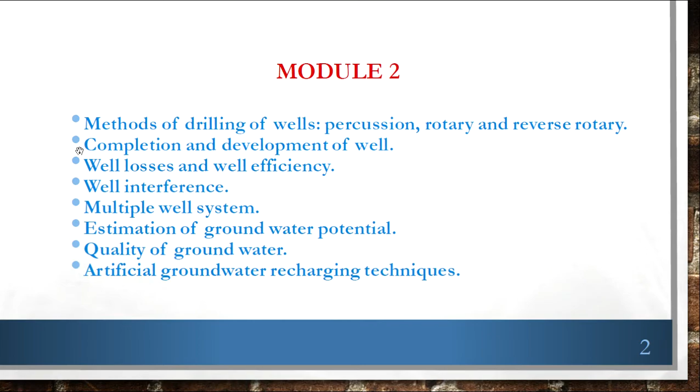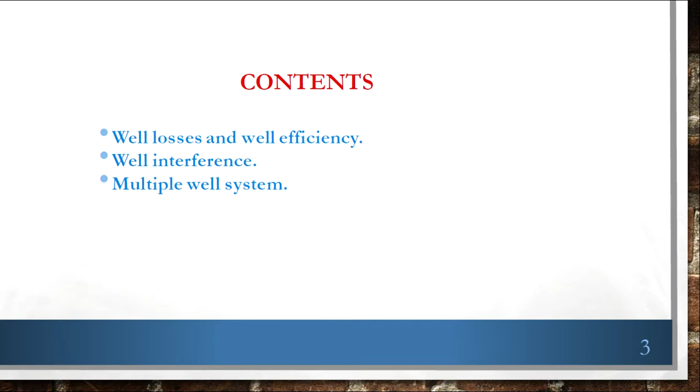In this lecture, we are moving on to module 2. In module 2, we are moving on to the contents: well losses and well efficiency, well interference, and multiple well system. These are the topics which we are going to discuss today. Before moving on to the specified topic, we have to know some important terms related to well performance.

First one is the static water level. This is the water level in the well, or water level in the well without pumping. If pumping is not there, then the water level in the well is known as static water level. It is the normal water level.

Now, what is pumping water level? Pumping water level is the water level in the well when pumping is continuing. So it will be lesser than that of the static water level.

Now, what is drawdown? It is the difference in level between the static water level and the pumping water level. When pumping occurs, the water level in the well decreases slightly. That decrease in the water level is known as drawdown.

Now, well yield or well flow rate. It is a volume of water per unit time discharged from the well. Example, in meter cube per day - how much is the amount of water discharged per day.

Another term is specific capacity. Specific capacity is the yield per unit drawdown, meaning capacity of the well per drawdown. Specific capacity is Q by S, where S is the drawdown.

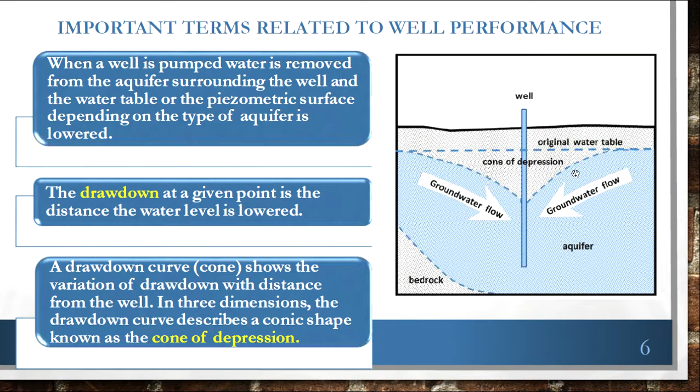Now we will move on to another term, that is cone of depression. This means while pumping occurs in a well, the water level in the well and the surrounding areas form the shape of a cone, that is known as cone of depression. In this figure, you can see the static water level and the pumping water level, and the area in between forms the shape of an inverted cone - this cone is known as the cone of depression.

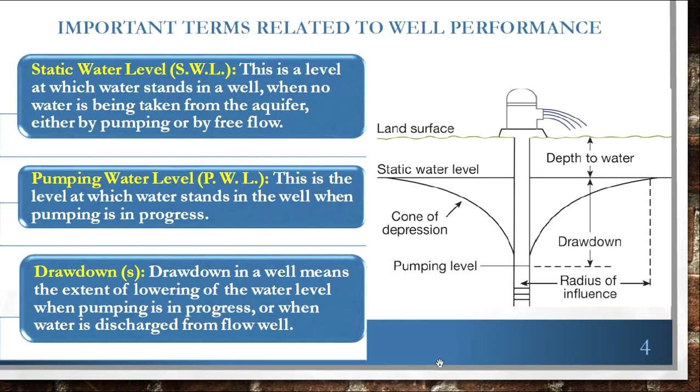Now, area of influence. We can say that it is the outer limit of the cone of depression. So how much area surrounding the well is influenced by this discharge or pumping - it is known as area of influence.

And radius of influence is the radial distance which is influenced by the pumping, or we can say it is the radial distance between the pumping water level and the original static water level during pumping. So these are the different terms which we have to know before moving on to the lecture. Now we'll move on to our first topic, well losses.

So what do you mean by well losses? We have discussed about drawdown - the decrease in the water level during pumping. But the calculated drawdown, we can calculate theoretically by use of some graphs and such. The theoretical drawdown and the actual drawdown will be different - it will not be the same.

That difference comes due to the losses in the well. In the well there may be some losses of water, some types of head losses. Due to that losses, the theoretical and observed drawdown will be different. That loss is known as well losses.

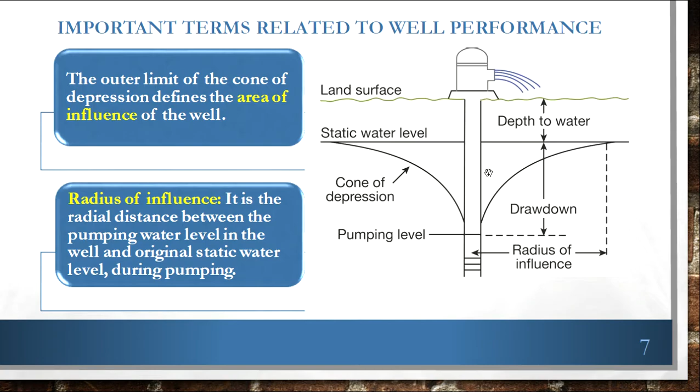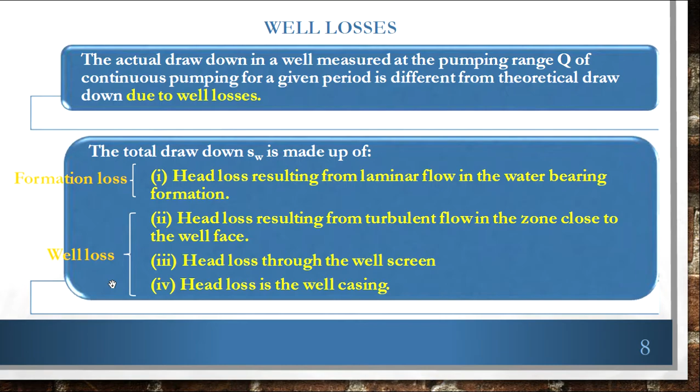Another reason for well loss is head loss in well casing. Well casing means this - when water flows through this, there is another head loss. So these are the different causes by which well losses occur. It can be generally classified as formation loss and normal well loss - these are the four reasons by which well losses occur.

This is an illustration of well loss. Normally, if there are no losses, the drawdown will be S1. Due to these losses, S2 will be the drawdown - that much water will be taken out of the well.

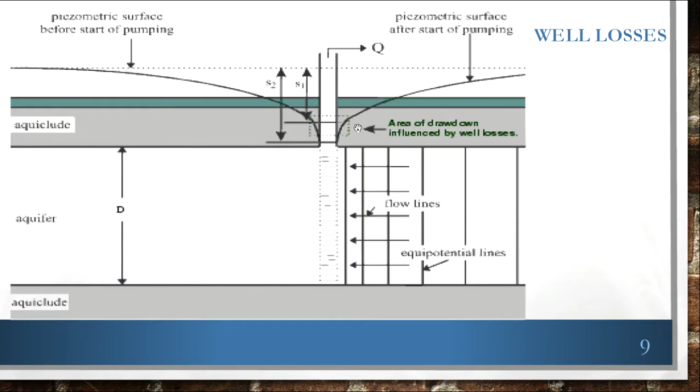Now how can we express the well losses? The equation for drawdown is given as the sum of formation loss and well loss. We have already discussed two types of losses in the well - formation loss and well loss. Well loss occurs due to three different reasons, while formation loss occurs due to one reason. So the total drawdown is a sum of well loss and formation loss.

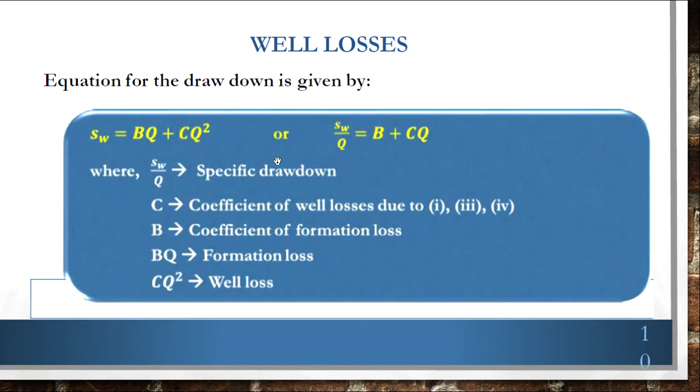Well loss is CQ square and formation loss is BQ, where B is the coefficient of formation loss and C is the coefficient of well losses due to reasons 1, 3 and 4 discussed earlier. This can be written as SW by Q equals B plus CQ, where SW is the drawdown, and SW by Q is the specific drawdown. This is the equation for well losses.

Now how can we calculate this? When we plot a graph between SW by Q and Q - that is specific drawdown and discharge - the graph will look like this. The slope of this graph will give you the C value, the coefficient of well loss.

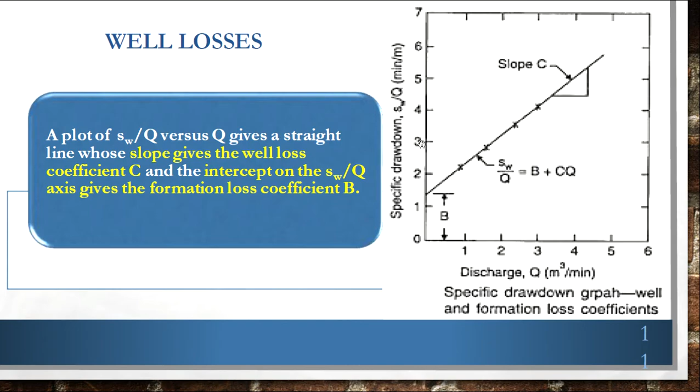And the intercept on the specific drawdown axis will give you the value B, the formation loss coefficient. So when drawing a graph between specific drawdown and discharge, the slope gives the value of C, and the intercept gives the value of B. This way we can calculate the well loss and formation loss.

Now how can we demonstrate these well losses? We can demonstrate this in three different ways. Well loss is there, but how can we say there is a well loss? What is the proof for that? There are three different ways by which we can demonstrate the well loss.

One is from the recovery immediately after pumping is stopped. The second way is from the distance drawdown curve if an observation well is available - this method can only be used if there is an observation well nearby. The third way is from the step drawdown test. These are the three ways by which we can demonstrate well loss.

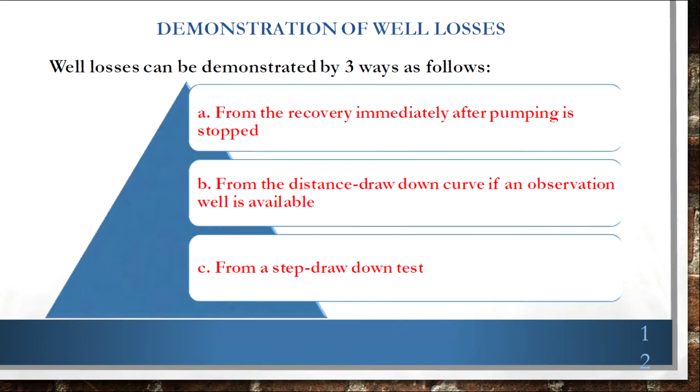Now we'll move to the first way - from the recovery immediately after pumping is stopped. If we are pumping the well, we see a constant rate of drawdown occurring. But if we stop pumping, there will be a cone of depression and a drawdown we can observe. When we stop pumping, the recovery will be higher - the cone of depression will get filled as water recovers.

Primarily, what happens is the filling of the cone will be rapid when we switch off the pumping. Immediately after switching off the pumping, the filling will be rapid, and after some time it will be gradual. So from that we can say that there is a huge loss at the part, a huge well loss occurred.

We can say that for the first 1 to 5 minutes after pumping is stopped, there is a rapid recovery of water into the cone, after which the recovery pattern is normal. So from this we can say that there was a huge loss. That is one demonstration.

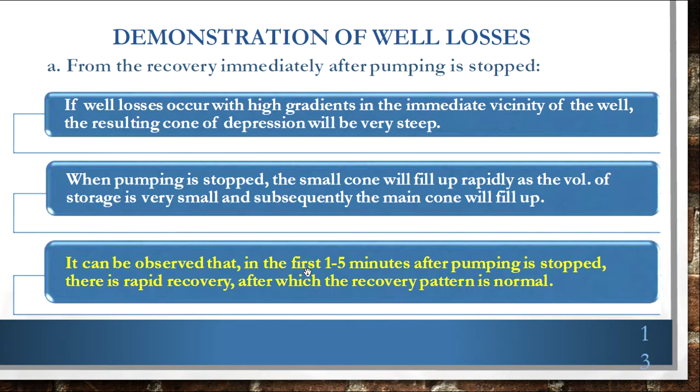The second way of demonstrating this well loss is from the distance drawdown curve, if an observation well is available. So if a well is available and we are doing a pumping test in that well, we can say that T is equal to 2.303 Q by 2 pi delta S, which is the equation for transmissivity. We have already discussed this.

Here there is a delta S, that is the change in drawdown. The distance drawdown graph for the effective drawdown is drawn or plotted and extrapolated towards the well at a distance of RE, the effective radius of the well, which is equal to the radius of the well plus the gravel pack.

So we are drawing a distance drawdown graph. Distance drawdown means radial distance to the observation well. Up to the observation well, we are taking different distances, and the drawdown at that particular place we are measuring, and we are drawing a graph and extrapolating this graph to the effective radius.

Normally it will be noticed that the observed drawdown is greater than the drawdown read from the graph, so the difference will give the well loss. This is another way to demonstrate the well loss. We are measuring the drawdown theoretically, and we are measuring the drawdown in the actual case. Now we are comparing these two drawdowns. There will be some differences, and from those differences we can say that there are some losses.

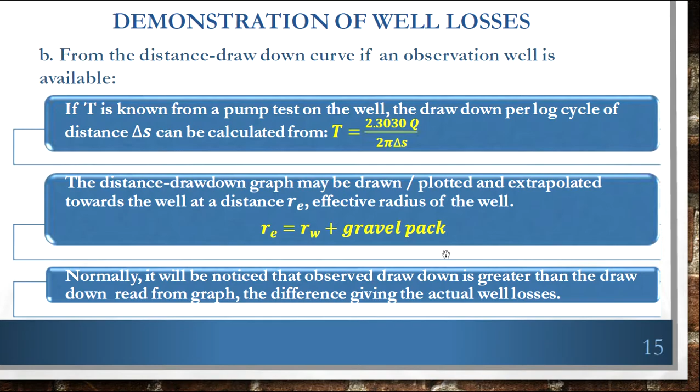The third method is from a step drawdown test. Step drawdown test means we are carrying out the test at 3 to 5 different rates of pumping. We are calculating the drawdown at the same location for the same time periods at different pumping rates.

For the first step, we are taking drawdowns at a 30-minute interval, for example, and the pumping rate is constant, say 50 liters per minute. So at that rate we take 30-minute interval readings of drawdown. That is one case. Now again we repeat the same pumping with a pumping rate of 100 liters per minute.

Like that, many steps are followed, and the well loss coefficient C can be calculated as delta S2 divided by delta Q2, minus delta S1 divided by delta Q1, divided by delta Q1 plus delta Q2. Delta S2 is the change in drawdown in the second case, delta Q2 is the change in pumping, that is, the increase in pumping rate at each step. Delta S is the difference in drawdown after completion of each step, and delta Q is the increase in pumping rate at each step. From this value we can get the value of C.

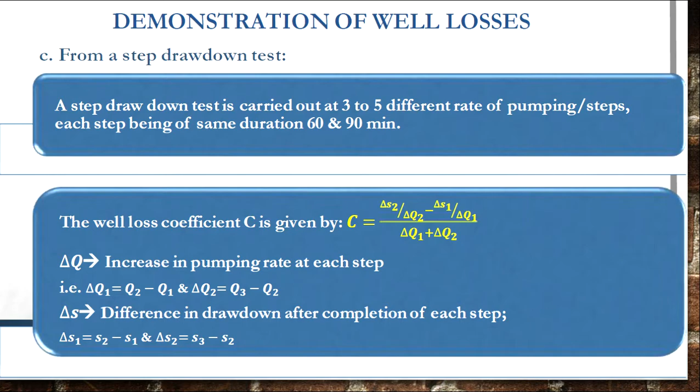If there are no well losses, then this delta value should be the same everywhere, but it is not. So we'll get a value for C here, and from this we can say that there is a well loss. These are the three demonstrations by which we can say that well loss exists.

Now we'll move on to another term, that is well efficiency. Well efficiency is nothing but the ratio of the actual specific capacity to the theoretical specific capacity. This is the computed specific capacity compared with the measured specific capacity. So Q by SW is the measured specific capacity, and Q by BQ is the computed specific capacity.

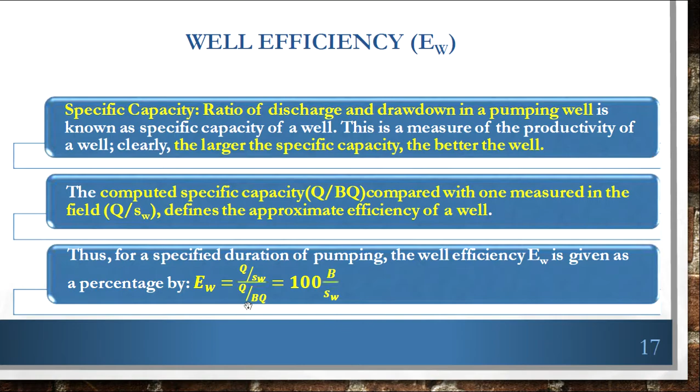We already know these terms: B is the formation loss coefficient and so on. So 100 into B by Q, with Q canceled, and 100 into B by SW, we get as the efficiency of the well. It is the ratio of measured specific capacity and theoretical specific capacity. Now we are moving on to another important topic, that is well interference and multiple well systems.

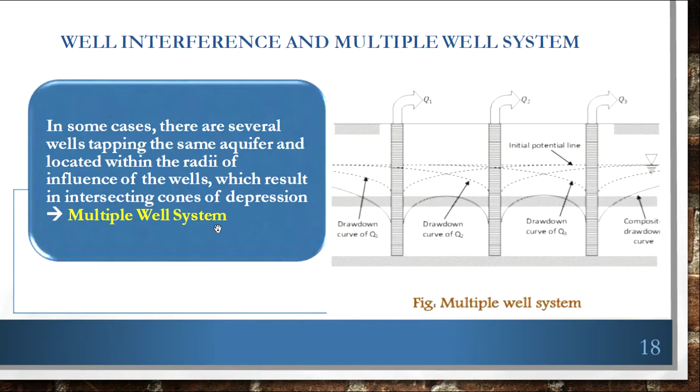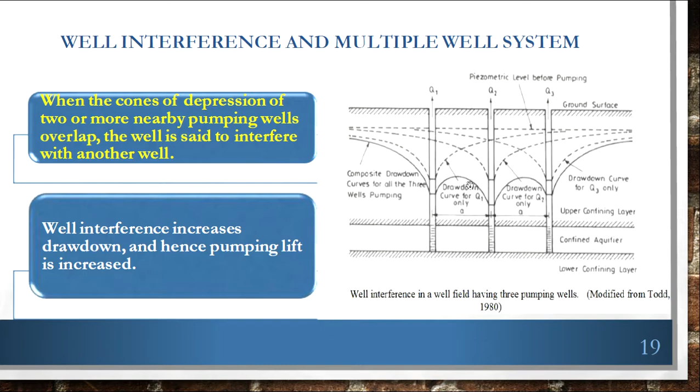In some cases there are several wells tapping the same aquifer and located within the radii of influence of the wells, which results in intersecting cones of depression. That is known as a multiple well system. When the cone of depressions of two or more nearby pumping wells overlap, the wells are said to interfere with one another because their cones are intersecting each other.

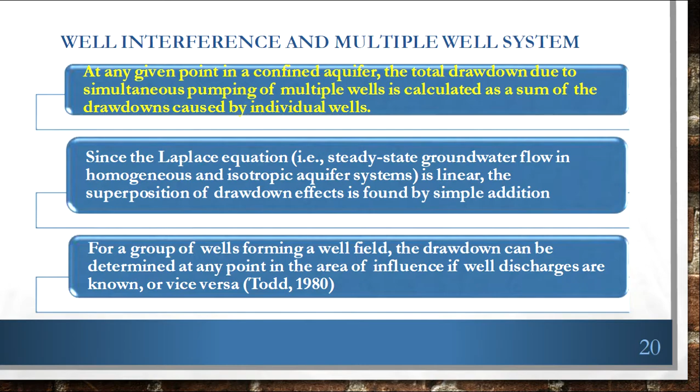Now, how can we calculate this drawdown in these types of wells? How can we calculate the drawdown? In case of confined aquifer, the well interference in a confined aquifer, we can see first.

In case of confined aquifer, the water is confined between two layers, an upper layer and a lower layer. So the thickness of the aquifer will be uniform and constant, because water will be filled in the entire thickness of the aquifer. So the transmissivity value will be the same; it will not change with space in case of confined aquifer.

So in case of confined aquifer, if a number of wells are tapping this aquifer, the total drawdown will be equal to the drawdown of well A plus drawdown of well B plus drawdown of well C, up to well N. The sum of all these values will give the total drawdown. This is specifically for confined aquifer.

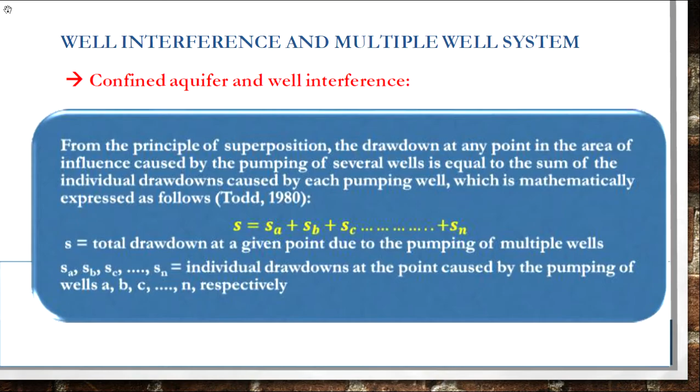Now we move on to the case of unconfined aquifer. Unconfined aquifer means it is not confined at the top portion, only confined at the bottom. So it has different thicknesses which will vary - in some places there will be deep depressions, in other places heights will be there.

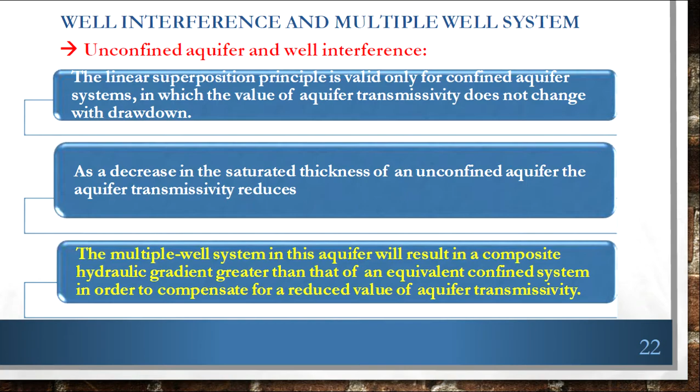So slope will change, and accordingly the transmissivity value also will change for this unconfined aquifer. So the drawdown cannot simply be added up, since the thickness and transmissivity are not normal. If we are tapping more wells in that kind of aquifer, we cannot add up the drawdowns for getting the total drawdown as in the case of confined aquifer. So we have to follow certain steps for finding the well interference in unconfined aquifer.

Step one: we have to determine the theoretical confined drawdown - if the aquifer was a confined aquifer, what would be the drawdown in each well. Step two: we have to sum up all the drawdowns, as in the case of confined aquifer.

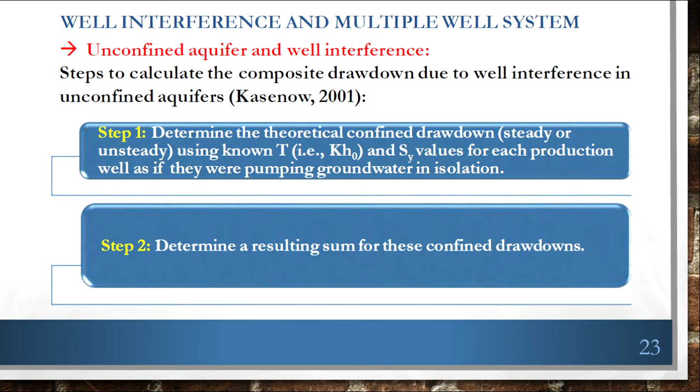The third step is we have to calculate a correction factor, because this is unconfined aquifer, so we cannot exactly give the value as in confined aquifer. We cannot exactly sum up all the things since that is not the exact value. So we have to calculate the correction factor for the unconfined aquifer.

The correction factor is: S equals H0 minus the square root of H0 squared minus 2 times S-dash times H0, where S-dash is the drawdown in the equivalent confined aquifer calculated in step 2, and H0 is the initial saturated thickness of the aquifer. The thickness will not be the same in this case, but we take an average or initial thickness.

Now, the actual drawdown from all the wells in this aquifer will be equal to step 3 minus step 2 - that is, the drawdown calculated in step 3 minus the drawdown calculated in step 2 gives the actual drawdown of this well interference in the unconfined aquifer, for the case of many wells.

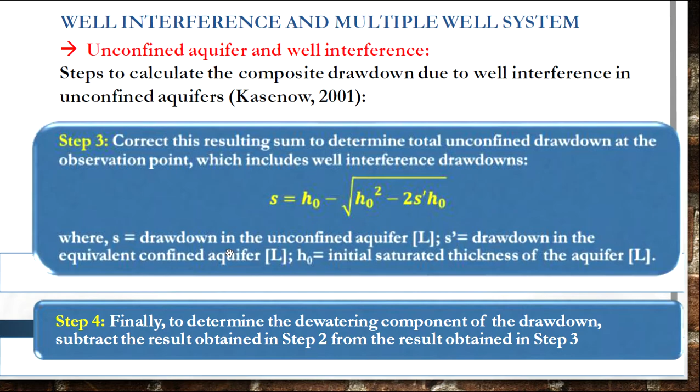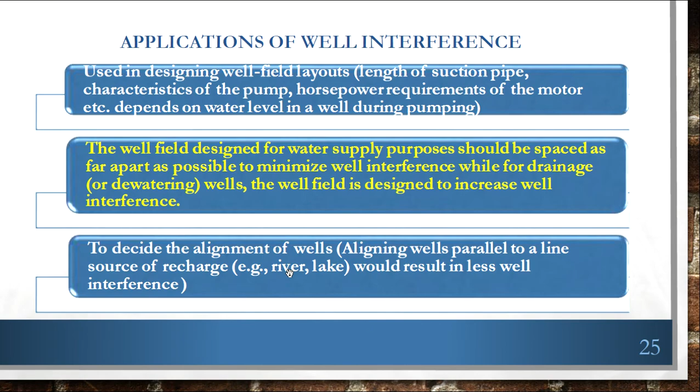So these are the different things which we have discussed, and there are certain applications for this well interference. It is very helpful in case of drainage - if we have to do drainage, well interference is very good because much more water can be extracted since the drawdown is higher. It is also very helpful in the alignment of wells. These things you can read. So this is about today's lecture. Thank you.